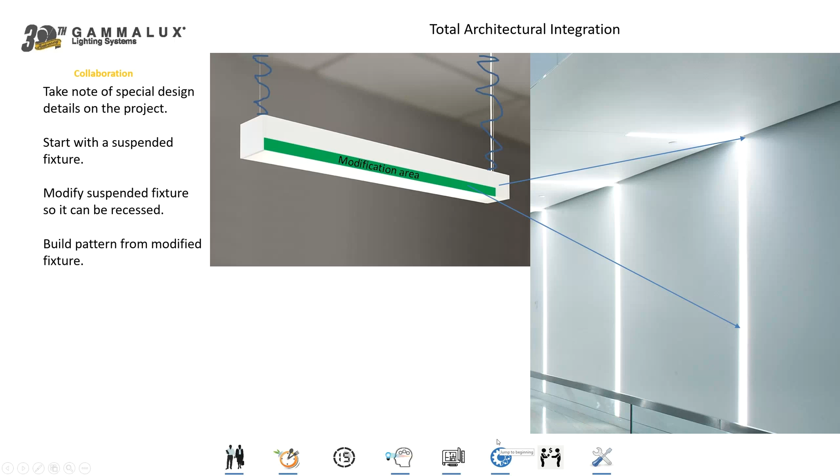And by doing that, we maintain a very clean aesthetic in the space while still providing the overall aesthetic advantage that the designer had envisioned. Now, when we build these recessed patterns of fixtures, we don't leave anything to chance. The way that we build them is very specific.

For the fixture that's in the wall here, we actually allow it to come across the ceiling by about 6 inches. So we make an L-shaped fixture. And by doing that, we give the installing contractor a simple butt joint about 6 inches away from the corner condition, and that allows them to work with the most simple form of joining possible.

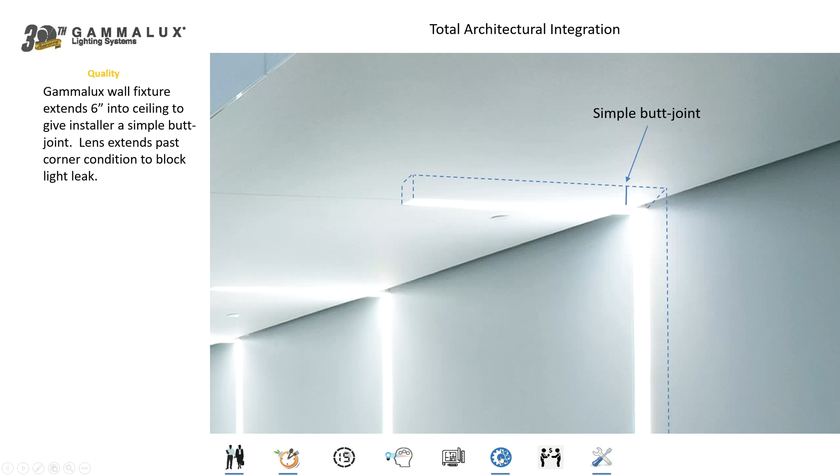So at the end of this job, we were able to give the installing contractor a very simple form while still maintaining the original design intent. And so we're very much into collaborating on projects like this to understand what's special about that job so that we can modify our fixtures as necessary in order to meet the needs of the space. And we do those modifications usually at no additional cost.

Now, in a very complex pattern of fixtures, whether it's suspended or recessed, you can see in the reflection in the glass here, this is quite a large pattern. This is one pattern of fixtures weaving its way through the entire floor of this building. Now, if you think about a very complex, large pattern of fixtures, you can imagine that there's a very large bill of materials associated with it as well, all the different parts and pieces that have to be ordered.

And that's really where things start to go haywire, because every distributor and contractor that's bidding on the job, they all have a different interpretation of all the parts and pieces that are necessary to go into that pattern. And so when they send a quote request over to the sales office, those quote requests are not consistent with each other, so the sales office has to give different answers to each of those different distributors. And this, of course, creates inconsistency and a lot of confusion.

So what we do is, before the job goes to bid, we want to offer to the designer what we call a development drawing. It's the same drawing that we would provide after a purchase order, but we actually offer it before the job goes to bid.

That development drawing takes all of the complexity of the designed pattern and actually creates a fully engineered drawing with mounting locations where we expect they're supposed to be, and the power feed locations, all the dimensions, all the angles. It's all laid out in one comprehensive drawing, and that entire pattern has one part number associated with it.

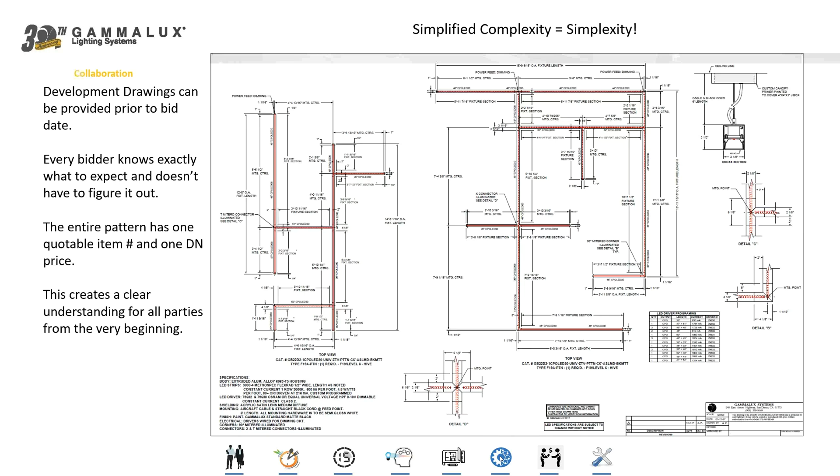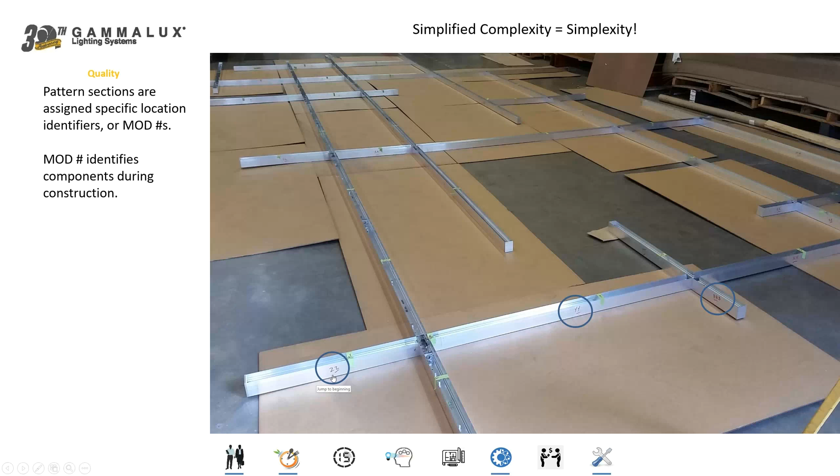But by starting with the designer's original design intent, we give other people the ability to maintain that original design intent throughout the entire process of purchasing, ordering, and assembling these fixtures. Now, because these big patterns of fixtures all have one part number, it's on us, Gammalux, to identify each component in those comprehensive patterns of fixtures. So we give each component what we call a mod number. And that mod number follows that component throughout the entire production procedure.

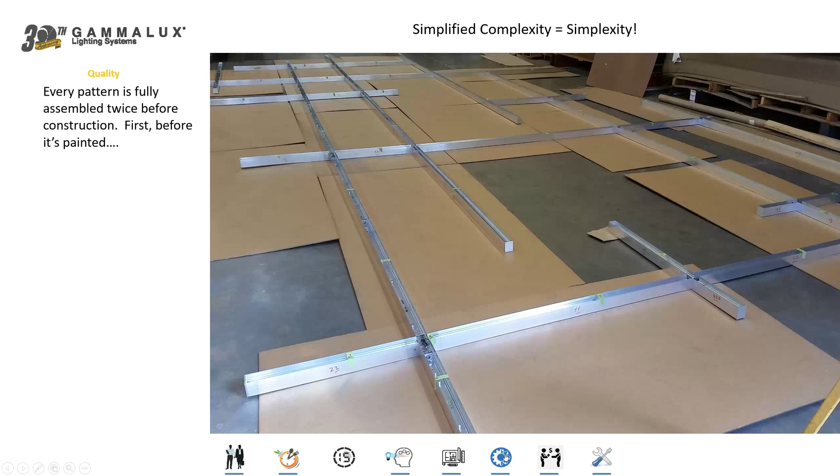Now, everything that we build at Gammalux is actually fully assembled twice before we pack it and ship it, whether it's a complex pattern like this or a 40-foot run using multiple housings. We fully assemble as a comprehensive pattern so that we can check all the dimensions, all the angles, making sure that the mounting locations are in the right positions, that the joining mechanisms all work and everything lines up properly. Then we take apart the entire pattern, paint it, put in the electrical, and reassemble the entire thing.

Now we're checking every circuit, every battery pack. We're checking the dimming. We're checking the daylight harvesting sensors, the occupancy sensors. We're checking all aspects of these patterns of fixtures to ensure that they don't just look good but also perform properly. And we do this on every single job. So this is why our lead time is a little bit longer than our competitors, but this ensures that everything looks and works the way that it should before the project ships out.

And this is the way that engineers operate, by properly checking all the contingencies, by sometimes double checking to make sure that their original findings are valid. See, Gammalux was founded 30 years ago by a father and son team of design engineers, and they owned and run the company. And so it's important for us as a manufacturer to have that engineering mentality, which also means fine attention to detail. So we want you to understand that we think in engineering terms.

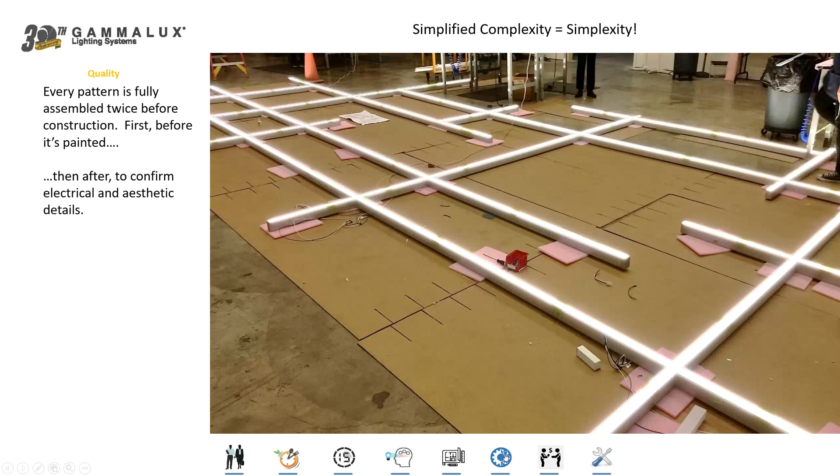Now, if you wanted to embed fixtures into the walls, usually you don't want to see that visible flange that goes around all four sides of that pattern of fixtures in the walls or in the ceiling. So you specify what you call a flangeless fixture. Well, those flangeless fixtures do have a flange, but it's a mud flange. It gets mudded and painted over, so you can't see it. Well, we have a mud flange on our fixture as well, but we actually include what we call an expansion gap as part of the construction of our fixture between our housing and the mud flange.

The reason for this is because when the LEDs or fluorescent lamps come on in the fixture, they actually create a little bit of heat, and this heats up the housing. And you know what happens to any material that heats up? It expands. So as the housing expands and contracts, normally it would put pressure on the surrounding plaster because the mud flange is usually attached directly to the side of the fixture. And when it puts pressure on that surrounding plaster, eventually you start to see those cracks develop.

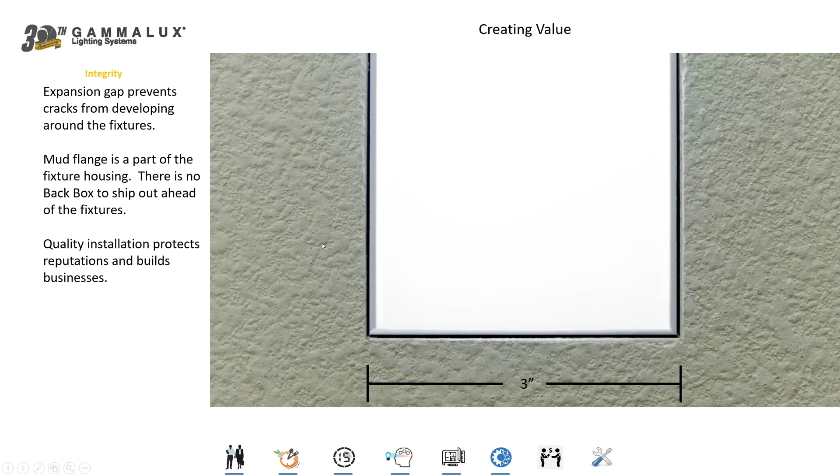But with our expansion gap built in at the factory as part of the construction of our fixture, it allows the housing to expand or even the walls to expand, and the two of those components never put pressure on each other. This eliminates the possibility of cracks developing over time.

Now, if we wanted to build fixtures all into the architecture, maybe coming around all four sides of that built environment, obviously we have to have exact field dimensions for this kind of thing. We will quote to CAD or designed dimensions, but we never build to design dimensions because we know the walls will not be built to design dimensions. So we require field dimensions from the installing contractor before we will start going into production on any of these fixtures.

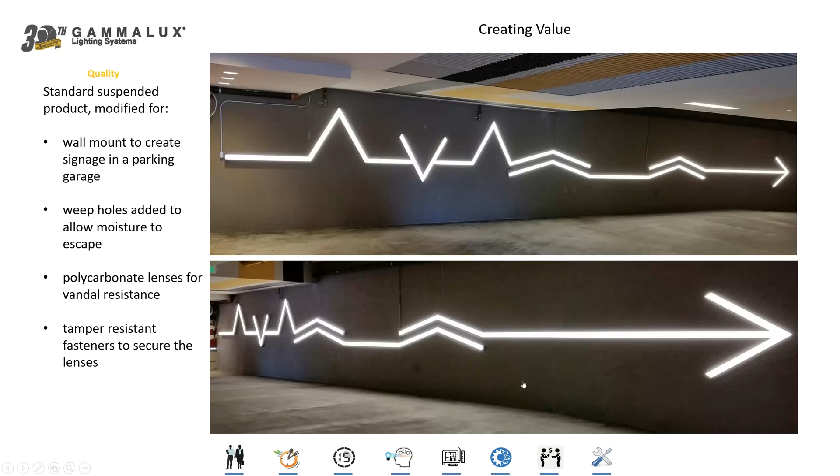All of our fixtures can be built either for individual or continuous run or patterns. Now, in those continuous runs, of course, we'll always fully illuminate that pattern from end to end with no dark spots and shadows. To my knowledge, we're the only manufacturer left who can make a 24-foot single-piece housing. See, we're working with extruded aluminum, which is very rigid. And if we have a tall rectangular shape, then that housing has a lot of strength to it. We can actually support that entire 24-foot single-piece housing with just 2 cables.

Now, certainly, if it's a continuous run, there will be multiple housings in those continuous runs. But it's a great advantage to Gammalux to be able to make a 24-foot single-piece housing because it eliminates the possibility of light leak at joints between fixtures, sagging joints which don't line up properly, and possibly pinching wires between those housings as they're being joined together.

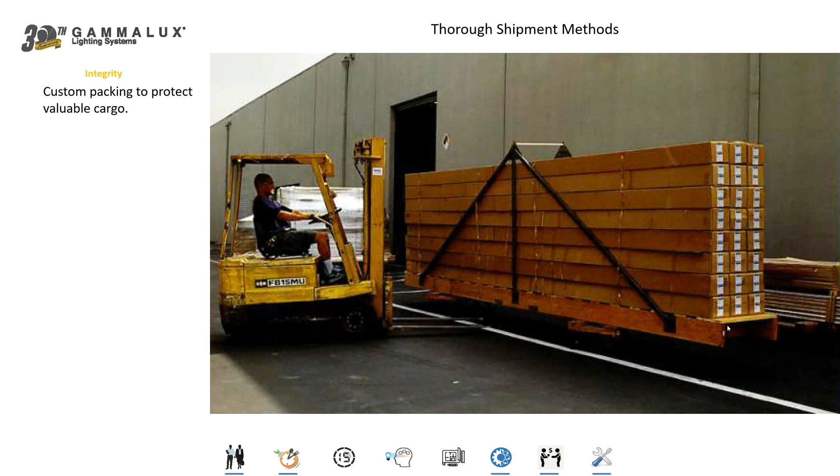Of course, how do you ship it? On a custom-made 25-foot pallet with a steel gondola holding the whole thing together, so when the forks come into the middle, we don't have 12 feet of fixtures dangling off the ends. We're very thorough in our methods. It's not about just building a quality product, but making sure that how we ship it maintains the quality of that product as well.

Now, this is a detail that I don't normally show to most folks, but certainly for engineers, it's a very important and an appealing detail. This is the end of a fixture that's going to be joined to another fixture in a continuous run. Okay, so this will be half of a joint between 2 fixtures. Now, in order to create that joint, we add this joiner plate into the end of that housing, and of course we screw that onto the housing itself.

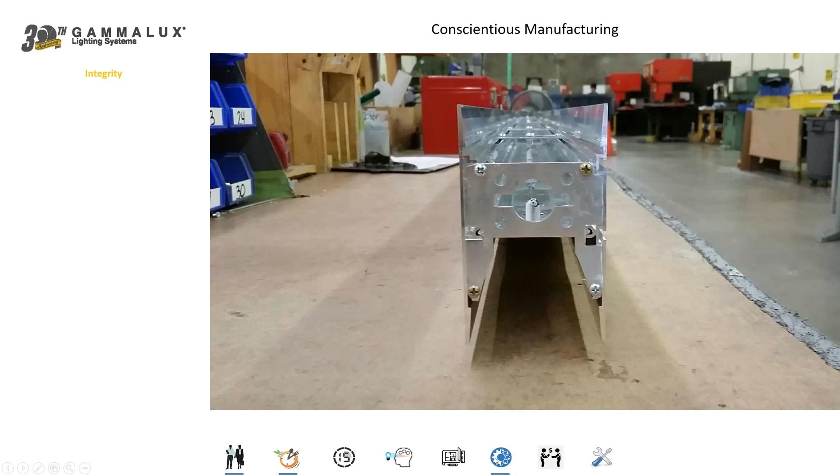Now, when it gets out to the job site, the installing contractor is going to use these 4 holes right here with a nut and a bolt in those 4 holes and the 4 holes in the adjacent fixture to join everything nice and tight. Now, when these screws tighten down onto that plate, they actually create a very undesirable effect. You know how screws go on, right? Righty-tighty, lefty-loosey, yeah? Well, when you tighten each of those screws down and you give it that last little moment of twist, you actually impart a very subtle twisting force into the housing, a torque.

Now, it doesn't deform the housing or bend the housing, but it gives it a little bit of a desire to twist. Well, when you have that in every one of these joiner plates, and you've got 2 joiner plates at each joint, and you have multiple joints in a continuous run, then eventually something's got to give. And what ends up happening is in very long runs of fixtures, you may be able to detect a very subtle twist in those housings. And of course, this is a problem.

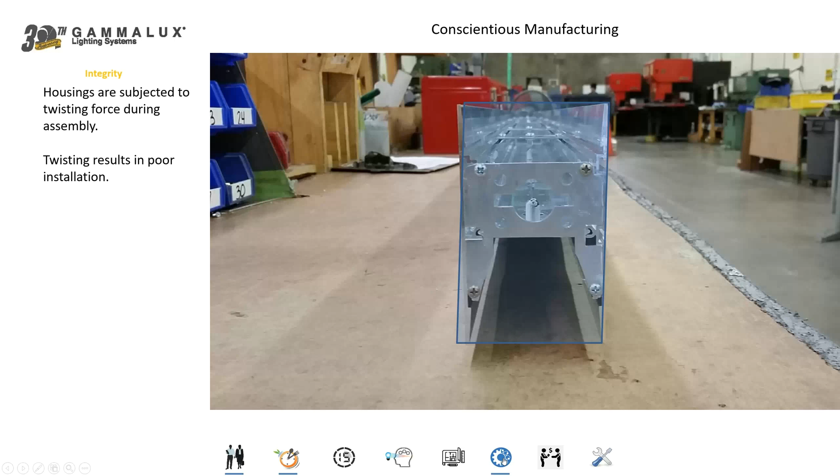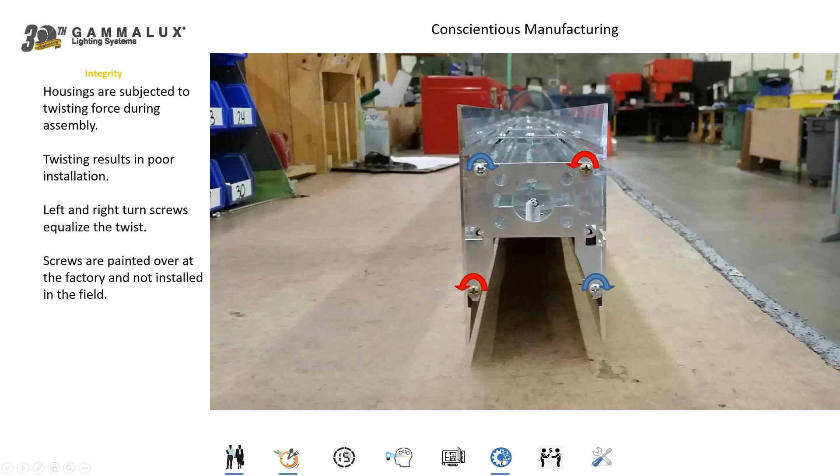So what we do at Gammalux, because we're owned and run by engineers, we actually use left turn and right turn screws to add these joiner plates into the end of our housing. Now, what this does is it equalizes and negates that twisting force, allowing for each of our joints to be perfectly straight all the way down our continuous run. So again, dealing with things with an engineering mentality solves a lot of problems before they even come up.

Now, here's a designer's original concept of a 12-foot fixture where 8 feet of that fixture is embedded into the lower ceiling, and the whole 12-foot fixture has direct illumination to illuminate the floor below. But the last 4 feet of that 12-foot housing would be suspended or exposed out of the wall to provide indirect illumination to illuminate the upper ceiling above. And then just for kicks, the designer also wanted no cable support from above for that cantilevered portion.

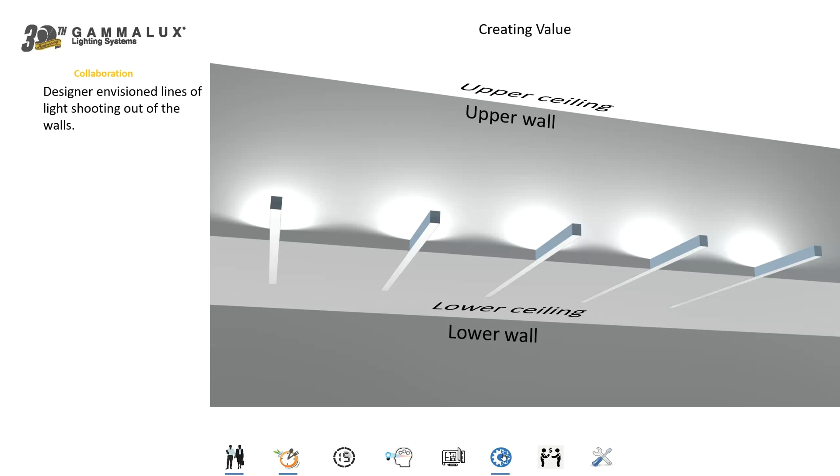So rather than building a custom fixture and charging custom dollars, what we did is we took a standard suspended fixture, again with smooth sides on it, and we modified that 12-foot long suspended fixture with our mud flange and a mounting plate in that 8-foot section. And of course, we coordinate that mounting plate with the installing contractor before we start building the fixtures so that when they open up the boxes, they know exactly what they're going to be getting.

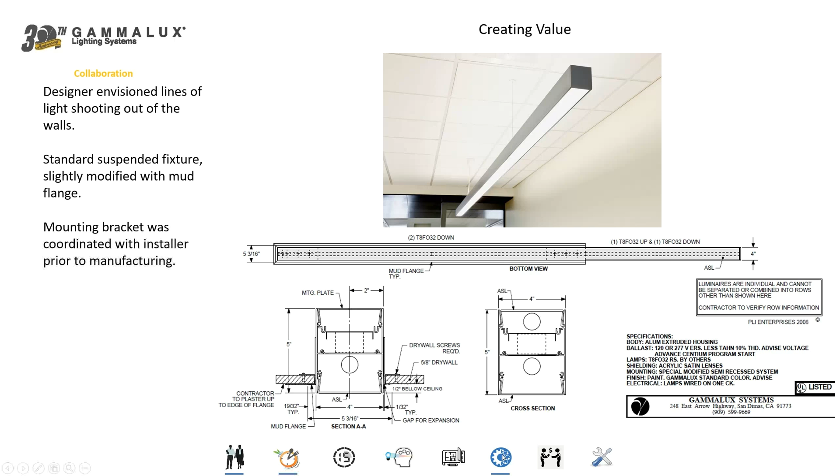In the last 4 feet of that fixture, we left the fixture unchanged. Lamp up, lamp down. This is a fluorescent job we did like 10 years ago, but the concepts still remain, even with LED. Now, rather than building a custom fixture, we just simply modified a standard fixture so that we could take that standard product and have 8 feet of that 12-foot housing embedded into the ceiling with the last 4 feet of that very same housing cantilevered out of the wall, and because of the rigidity of that housing material, we don't need the cable support from above.

This is not a custom fixture. This went to the job site at less than $200 per linear foot, and we never got one phone call from the installing contractor afterwards. There were a lot of conference calls leading up to that and coordination with the mounting components, but once we get past that point and we go into production, the installing contractor knows exactly what they're going to be getting, and there are no problems in the field afterwards.

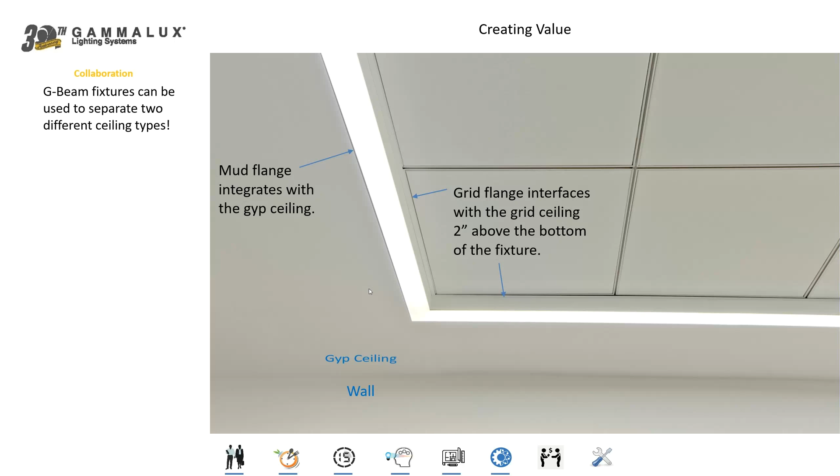So we can actually use our fixture to delineate two different ceiling systems and also allow one of those ceiling systems to be at a different height than the other one. And we're doing all of this by using the fixture as the delineating element, which reduces a lot of the construction cost in the project and speeds up installation.

And because this is happening at an angle, it occurs at a different location in every single fixture all the way down the left side of the room on 6 floors. This is all one type on the fixture schedule, but no two fixtures were identical. We cut those flanges down to 256th of an inch here at the factory to ensure that everything fits together like puzzle pieces. We never got one phone call from that installing contractor after the fixtures shipped.

And it's because of all the coordination that we do ahead of time. We're very much into the fine details and making sure that we get accurate information so we can build products appropriately for the space.

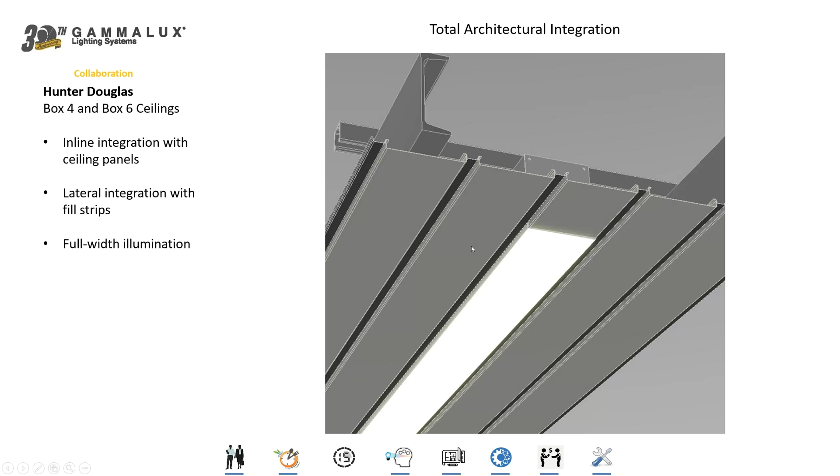The truth is, any fixture can fit into any ceiling system if you bang it into place and if you cut that ceiling in a way that it's not supposed to be cut. But we don't want people to have to do that. That's why we build our fixtures specific to that particular ceiling system, whether it's Armstrong or Hunter Douglas, you name it. Our brackets are always going to be designed properly to slide across to any position across our fixtures to interface with those universal carriers wherever they happen to occur.

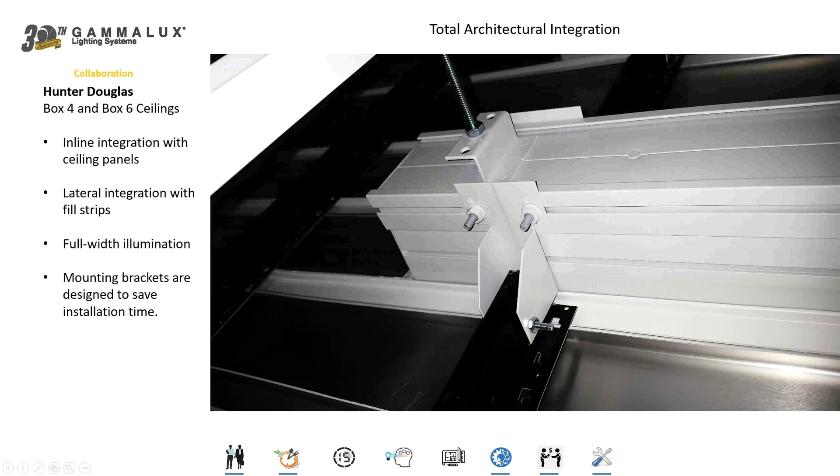Now, when you're running lighting calculations, obviously accuracy is very important. It's certainly a very important part of good design. So, in order to be accurate, in our lumens per foot delivered chart on page 2 of our specification sheet, we actually show you the actual lumens that are going to be delivered by those fixtures from real laboratory test results in all 5 color temperatures of the LEDs that we offer, in either standard output or high output, with either the medium diffuse lens or the heavy diffuse lens in the bottom of the fixture.

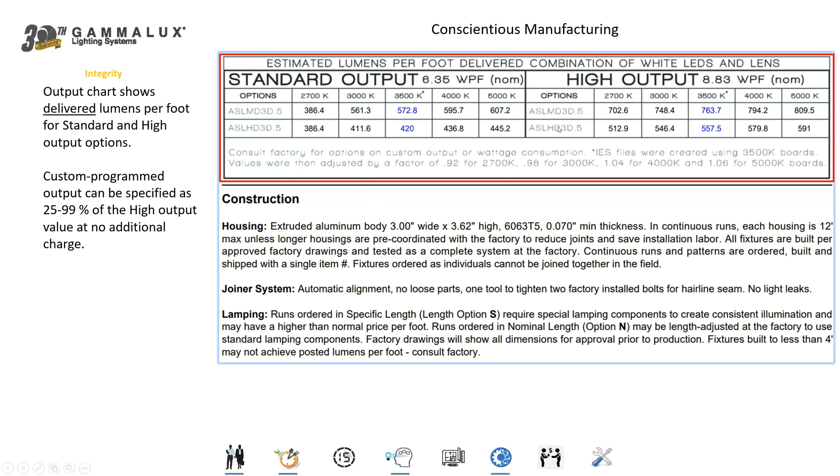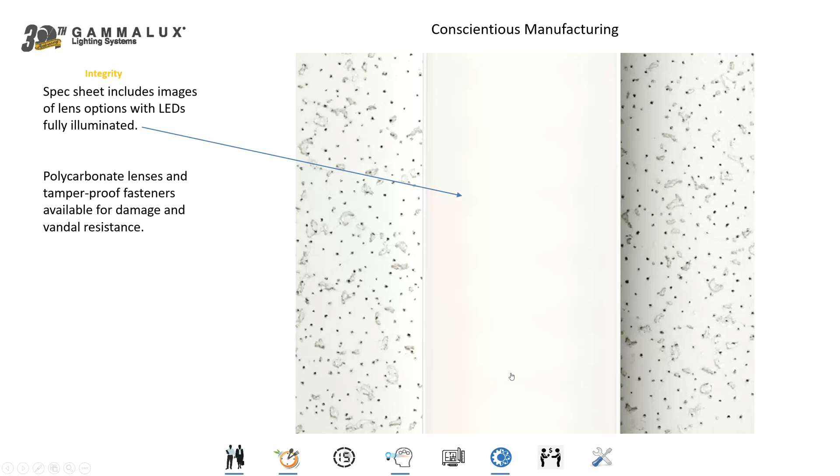Now, to my knowledge, we are the only manufacturer that actually shows you what the lens is going to look like in that fixture with the LEDs fully illuminated behind it. This is not a photoshopped image. We don't do that kind of thing. Now, certainly, every manufacturer has that glamour shot of the fixture in a very perfect condition. But nobody ever shows you what those lenses are going to look like as you're looking straight up from your desk up into the bottom of that fixture. We do.

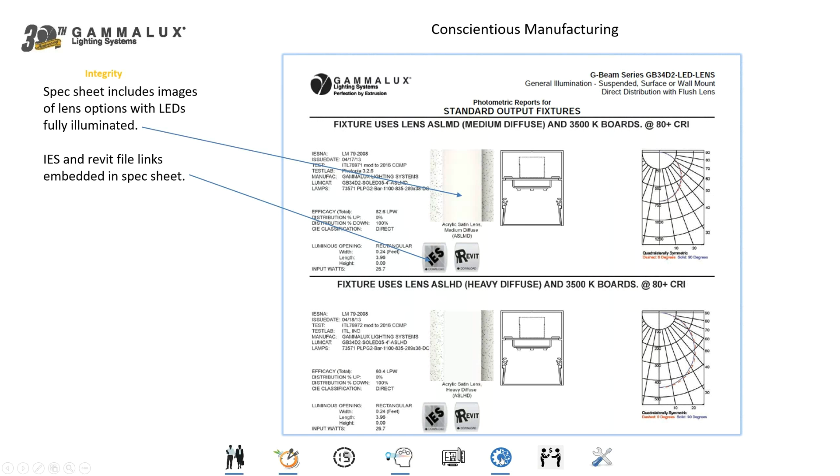In addition to that image, right next to that image in our specification sheet, there's the hot link for your IES file. There's the hot link for your Revit file. So you don't have to go back to the manufacturer's zip file and play catalog number bingo trying to figure out which one is the right file. We always put that information out available for you in a very easy fashion.

All of our fixtures can be made suitable for damp location. We don't do any wet location, but if the fixtures are under a canopy, even though it's an outdoor environment, we can build our fixtures for damp location to allow them to be suitable for that situation.

Wall washing is a very important part of good lighting design. Obviously, if you're going to wash a wall, it's because there's something important happening on that wall, and usually you want to wash that wall as evenly as possible. With our wall wash fixture set 36 inches away from the wall, in this particular application, using 80-50-20 assumptions, we can get a max of 49 foot-candles and a min of 42 foot-candles.

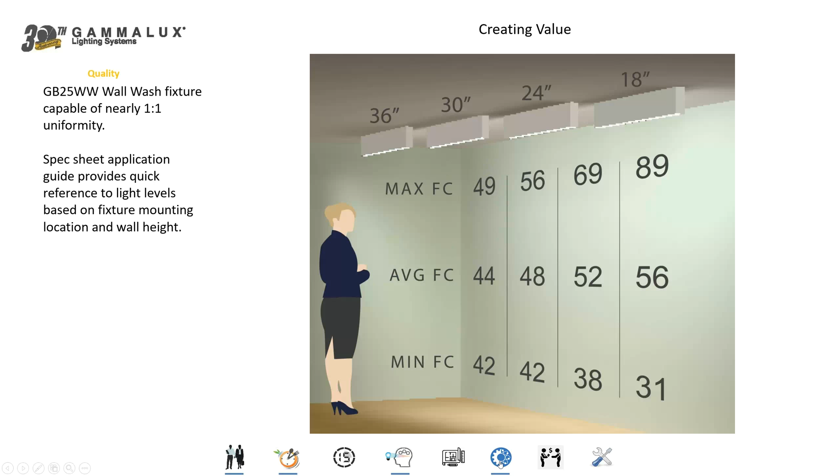That is a 1 to 1.17 uniformity ratio on that wall, which is absolutely amazing. So uniformity on the wall is very important to us. So important that we actually add a kick reflector on the bottom of our fixture so that it can reflect light all the way to the top of the wall.

Usually these wall wash fixtures have a shadow at the top of the wall. We don't want that, not on an object wall. So that's why our fixture has a kick reflector on the bottom. Also, the kick reflector acts as a glare shield, so the people in the room can't see up inside the fixture unless they're actually directly underneath it.

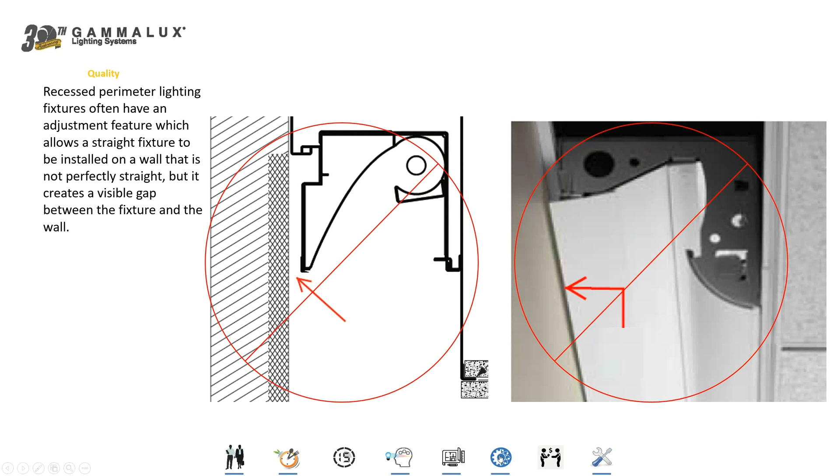These fixtures can be built to any length, whether they're individuals or continuous runs, and we can actually build them as comprehensive patterns, fully illuminated patterns as well. In the world of perimeter lighting systems, we've gotten rid of that ugly gap that's often found between the fixtures and the wall with our competitor fixtures.

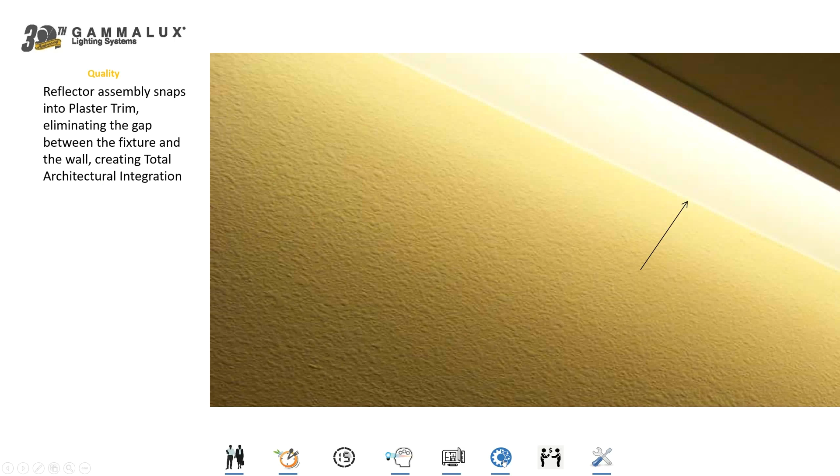What we've done is we've created a mud flange that gets installed onto the unfinished wall just above the ceiling line. And that mud flange has a little groove which receives the reflector assembly from our fixture so that once it's installed, it eliminates the gap between the reflector and the finished wall, allowing the reflector to actually dive into the finished surface of the wall.

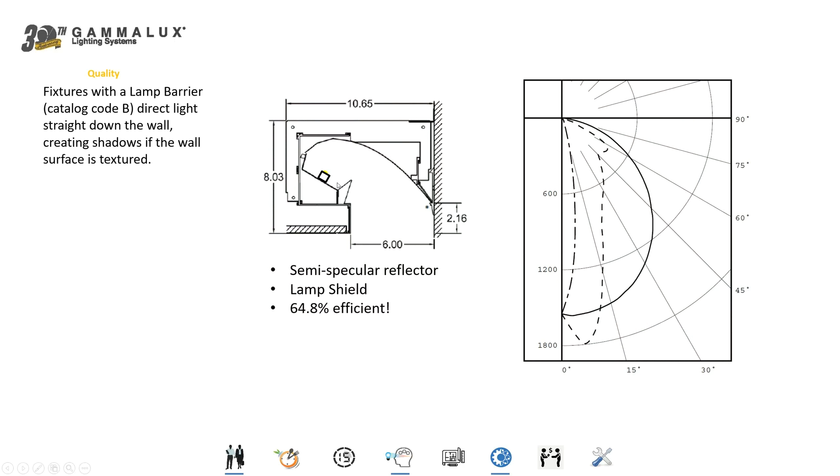As far as illumination, we can graze the wall to create shadows on the most shallow texture, or we can use the wall as a reflective surface with our ambient illumination optic to bounce light back out into the space. The grazing illumination uses a parabolic-shaped semi-specular aluminum reflector and a reflective lamp barrier. So light hits this lamp barrier, bounces up into the main reflector, so it can be shot straight down the wall to create this very nice, tight candle power curve.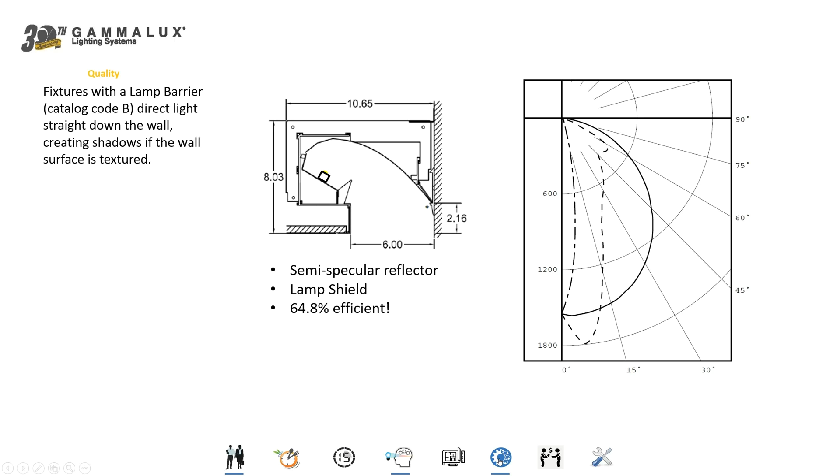That fixture is almost 65% efficient, and the lamps are completely hidden from view, even in the reflection of a mirror. You actually can't see those lamps at all. Now, if you don't want to use the grazing optic and instead you want to use the ambient illumination optic to bounce light back out into the space, we have that as well.

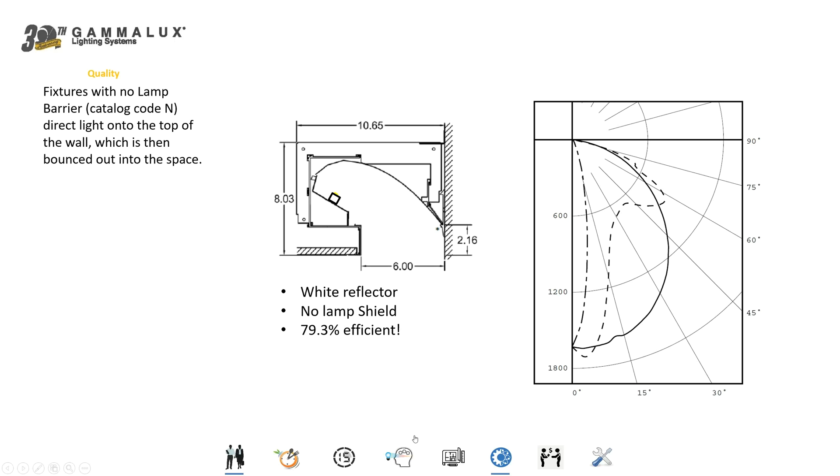Rather than a semi-specular aluminum reflector, we use a white reflector, which is diffuse and allows more light to hit the top of the wall. Also, we eliminate that lamp barrier, allowing a direct spike of light onto the top of the wall that you see here. Those lamps are completely hidden from view when you look up into the fixture, and that fixture is over 79% efficient. These can be built in continuous runs or complex patterns.

We've reintroduced the round fixture back into the world of lighting. It was gone for about 10 or 15 years. Of course, we've given our fixture rotation capabilities so that you can aim it wherever you like in the field. Our G-beam portal fixture takes advantage of all the integration capabilities of our G-beam housings, but rather than having a white lens on the fixture, we have this backlit acrylic.

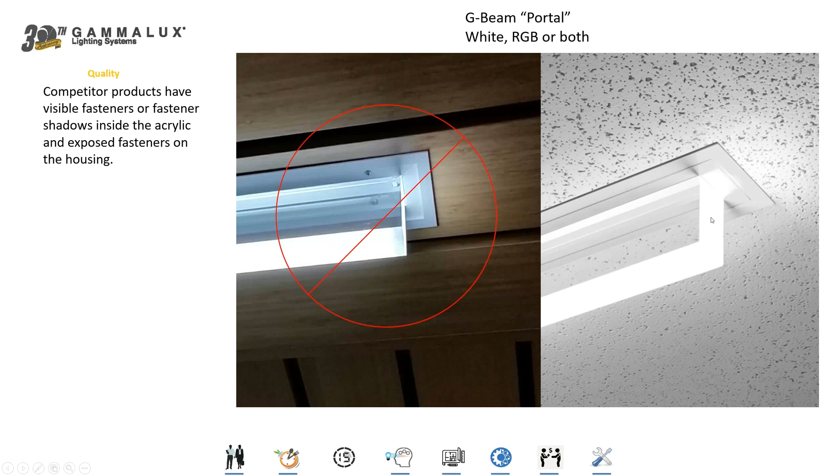Now, we were not the first to go to market with this product. The Mark Finn was the first, but it has some exposed fasteners and fastener shadows and things of that nature, which we don't think are very pretty. So we've cleaned up the aesthetic for our version. If you're not going to be first to the market, you have to do a little bit better than the original. Our fixtures can be used as individuals or as continuous runs, where there will be a small gap between the acrylic blocks. In grid, gyp, fabric, metal ceilings, wood ceilings, doesn't really matter.

All of our LED fixtures offer RGB function on DMX control, which is very common. If you need a white circuit, we will also include that as a completely independent circuit, so that it's capable of full output and complete dimming capability. All of our fixtures offer 13 standard finishes, as well as wood grain finishes for an adder, for a very unique kind of look, a distinctive type of look in the space. Obviously, that's not right for every job, but for the right jobs, it's quite a dynamic feature.

We hope that you see that all of our attention to detail, the way that we manufacture, the way that we ship, and the way that we assist the installing contractor to do their very best work allows Gammalux to become part of the architecture in a dynamic and valuable way.